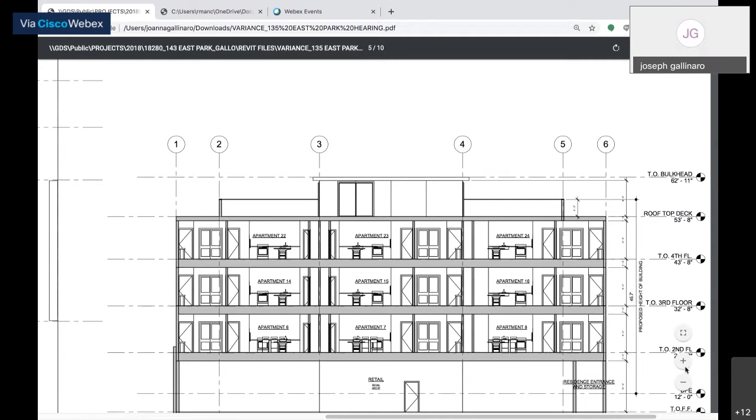Good evening. Joseph Gallinaro, 185 Lagoon Drive East, Lido Beach, New York, 11561. Hopefully, can everyone see my screen at this point? Yep. Yes. Okay, great.

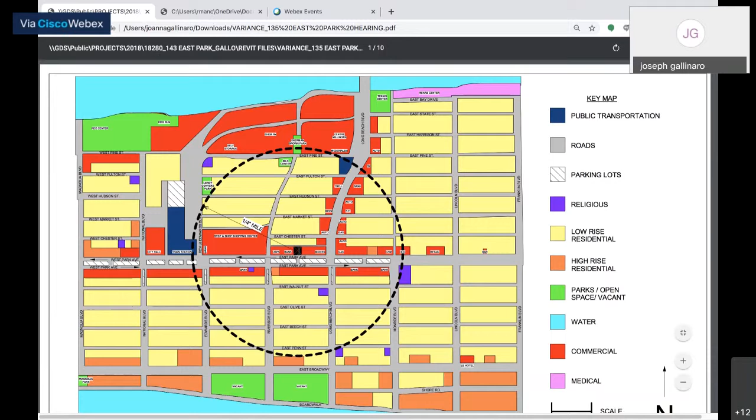This dashed line here, this circle, represents a quarter-mile radius circle around the center of the building, and when doing planning and city planning, it's sort of a rule of thumb where a quarter mile is the comfortable walking distance that one could expect when designing for a person to travel to or from. So within this circle, you see all of these amenities that the city has to offer for the building. Just outside of that, you have the boardwalk and City Hall. There's the library right here. You mentioned the rec center and so on. So it's a very appealing design if we are going after a New York City or a Brooklyn Heights model.

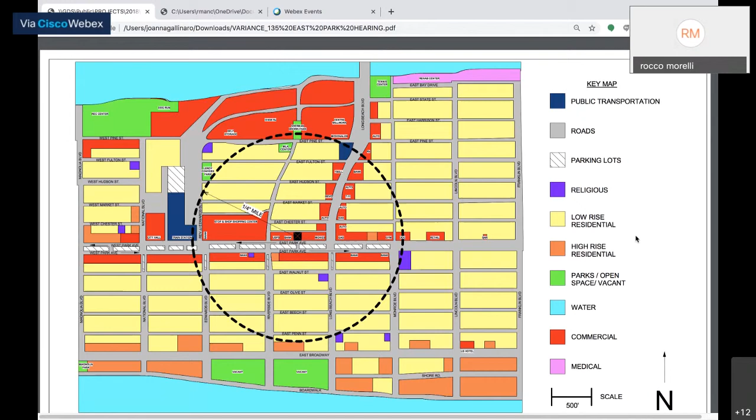But the fact is that it's still a suburban town. I don't know, I mean personally, I think that even though millennials will ride their bikes and get around, they still have cars. My concern is where are they going to park? At least half to two-thirds of the residents would own a car, so we've got to deal with that. And again, a 1-bedroom apartment is great, but their friends are going to come over with a car.

So I just want to more specifically hone in on that because I understand, it's a very appealing scenario to have this if this was downtown Brooklyn. But since it is a suburban town, I do worry about the parking and the congestion because I don't want to see this turn into Brooklyn or the areas in Queens like Long Island City that are very close to the city. They're very desirable areas, they've gotten really expensive, and I hear what Mr. Kelly was saying about how millennials want to move out of the city, work from home, work remotely, like we're doing right now. We know that's going to be the model for a lot of future businesses. But we still need to specifically talk about the number of units and what the parking is going to be provided for it, because I'm sure the commissioners are concerned about that.

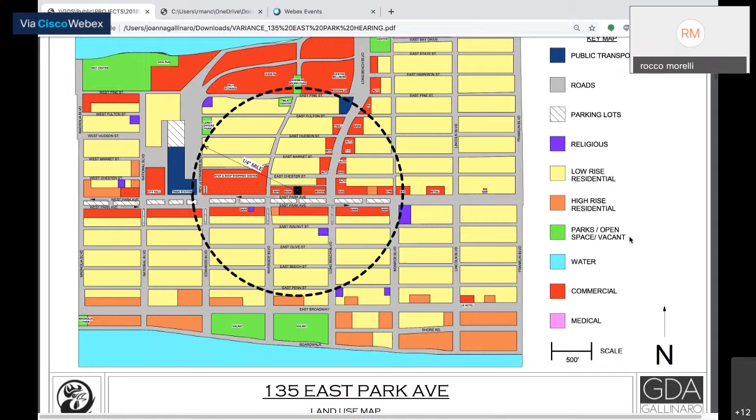So to that end, what we have here is the zoning and the parking spaces required that we're showing.

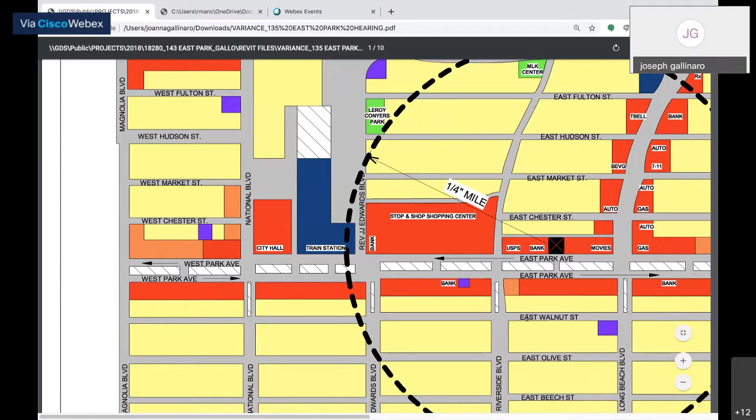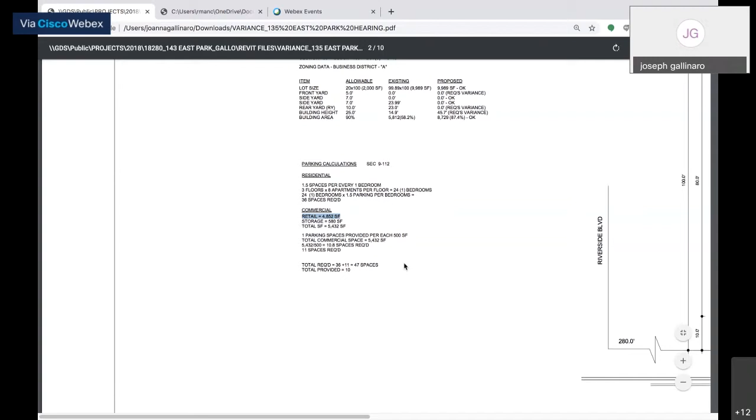Here we have our calculations for the parking per section 9-112, where there would be 3 floors of 8 units, 24 one-bedrooms, requiring 36 parking spaces. We have the commercial storage, and the total retail square footage is 4,852 square feet. The rest of the ground floor, which I'll show in a larger plan in a second, is for storage, entry, exit, lobby spaces, staircases, elevators, and so on. At the bottom, the total required space would be 47 spaces, broken out as 36 for residential and 11 for commercial. We are able to provide 10 spaces at the rear of the building, so we're roughly slightly more than 20%.

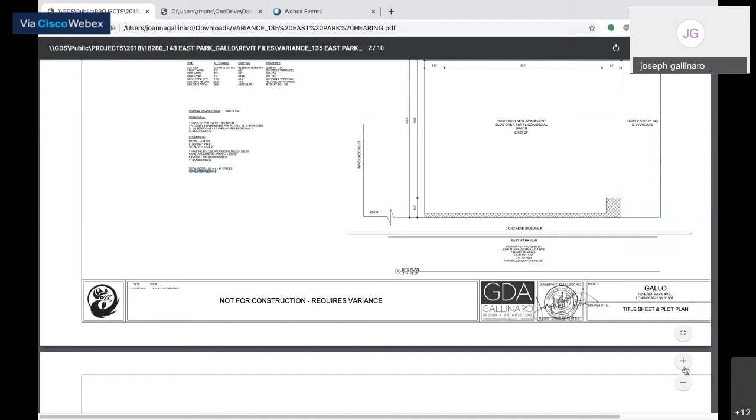Sorry, go ahead, talk about that. Let's talk about that for a minute. Let's be optimistic, Mr. Gallinaro, and say that the 11 spaces you're looking for the retail portion of the building are something we can't do anything about, so I'm not even going to count those in my own calculations. Let's say any storefront that's there is there, unless the type of business would be dramatically different than what existed. Let's suffice it to say I'll shut my mouth about that, and that the 11 spots are a given we're not really going to count.

So let's zoom in on the residential, which is something new that we don't have yet. We're talking about 36 required, and you're proposing 10 spots, correct? That's correct. So basically, that's 1 spot per 3, or actually 3.6 apartments, is what you're proposing.

Now do any members of the board want to talk about this? Because I'm sure this is where people's concern is going to lie. It's a beautiful looking building, the concept Mr. Kelly presented works nicely, but I think the meat of the matter right now is going to be the parking. It's on a congested block. This isn't the block between Magnolia and Laurelton where 235 sits, which is a big building with parking, and certainly a building like Granada that doesn't have any parking has been there for 75, 80 years.

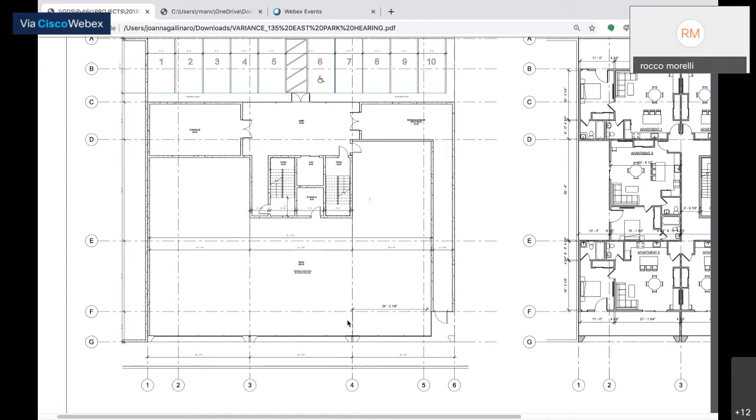So let's talk about this unique situation as I see it, because this is new construction. As you know, there's a lot more latitude with new constructions in terms of complying closer to the code than there is with stuff that's either being renovated, like 249 East Park, or renovated from an old school, like 185 West Park. So let's talk about the number of units relative to the parking, okay?

Sure. So the first thing is, unless I misheard you, there are 24 units with 10 spots, so we're at one spot per 2.4 units. Right, okay, yeah, so we're roughly 27% of what required parking would be for the units.

There's a difficulty in providing parking for any building that's tight like this. I have right now the ground floor plan open.

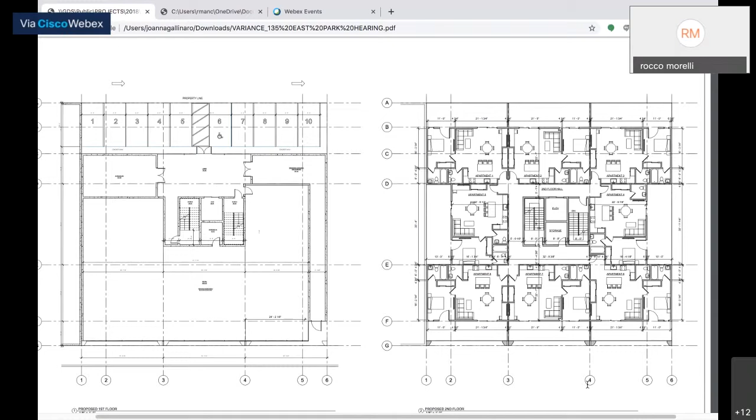We also have Darren and William Gallo on. Should I leave them muted, or should I unmute them? I'm bouncing back and forth between screens, between presenters. Let's at least question Gallinaro a little bit more about it, because I'm sure some of the other commissioners have questions. I don't think I answered everybody's questions by my line of questioning. I'll leave them muted, let me know when I should unmute them.

Unmuting Mr. Gallo and Mr. Gallo, you're both unmuted right now. Can you guys hear me? Yes, yeah, go ahead. I don't have a question necessarily.

I just wanted to make a comment regarding the parking discussion and the commercial space downstairs. I just want to make sure, and I hope everybody else is on board, thinking aesthetically, I don't think it would be pleasing to have parking underneath the building in general, because it's like a walking section of the island, and I think the least aesthetically pleasing thing would be parking under the building. If you look at other communities throughout Nassau County, a lot of their commercial buildings have parking underneath, and it becomes very unattractive to the town. So I don't think putting parking underneath is a solution.

I agree with you aesthetically, Erica. However, I will say that if the challenge is that retail is suffering, and it may suffer more with time based on the Amazons and everything else going on, I think it would actually change the balance. They'd have to do something aesthetically pleasing to make it work, but it would take out a little retail and add some residential.

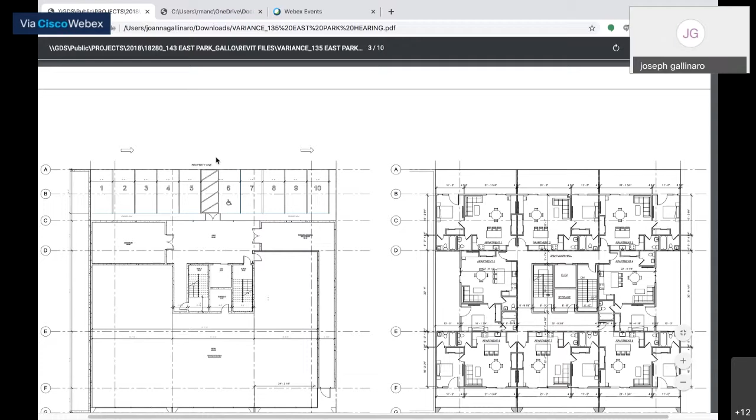And you couldn't access parking from that, like for the residential units at least? Well, that's how we are. This is the rear of the building back here. Here's parking in the front, where the retail entrance comes in off the sidewalk. There's a private entrance for the residential off the Park Avenue side, or the southern side of the building, where you walk through back into a lobby with the elevator. The driveway, the small road that's back there, the existing road being utilized today, remains. Our building is set roughly 23 feet in from that, so you can come off that existing road and park in here and then walk into the lobby that way.

Can I be heard right now, Joe? I can hear you, Darren. Okay, so existing behind the building now, I just wanted to mention, is about 8 spots. We're actually adding spots because we're closing out the alleyway that people have been driving through, which is part of our property, the alleyway on the west side that he's pointing to right now. By closing that alleyway off, we add 3 spots.

It's actually a very dangerous alleyway. I've driven down it and seen people almost get hit a couple of times on that sidewalk because they don't pay as much attention there since it's a vacant building. It's very tight, yeah, it's an alley. So we're adding 3 more spots by closing that in than what's there today, behind there, and adding a handicap spot.

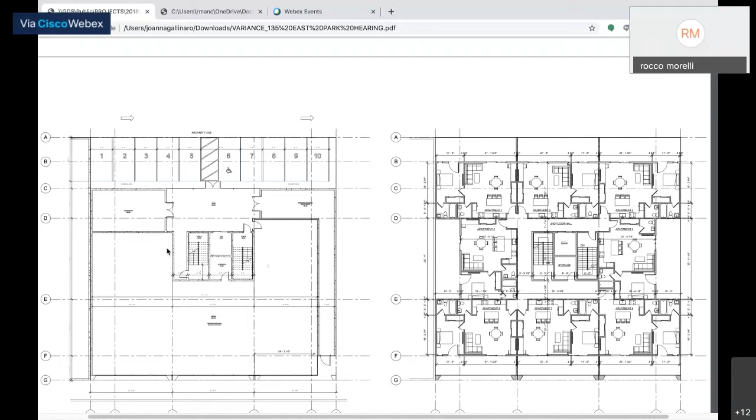I'm not really sure who utilized it then, but I can tell you now, since we've owned it, and I'm friendly with Gentle Brew and Yummy Yummy, basically I park back there, Gentle Brew parks back there, and Yummy Yummy will put one car back there today. So it is being used today just for being a friendly neighbor, since they usually park in front or across the street, and I allowed it. I said, why don't you just park back here, we have room. When the bank was there, you parked back there to go into the bank.

That's right, going to the bank, that's right. That's what it was, and it was part of a drive-through thing too. We used it to go to the movies back in the day. Right, yeah.

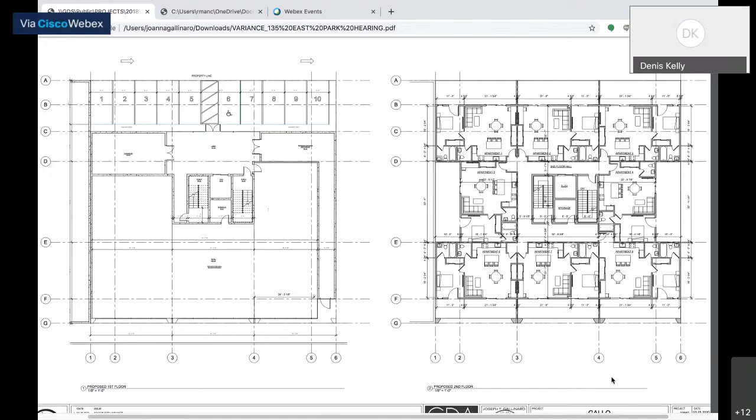Well, I'd certainly like to see some financial justification. I think this would be a very important part of a presentation here. So it's Denis Kelly speaking again. What we can do is put that together for you, Mr. Leonetti, Commissioner, and also try to see how we can even make the parking better if possible. Maybe I'll get in touch with Mr. Berrios and talk to him about what headway we've made, as well as getting you that financial analysis you're looking for.

How long has the building been owned by the applicant? Since December.

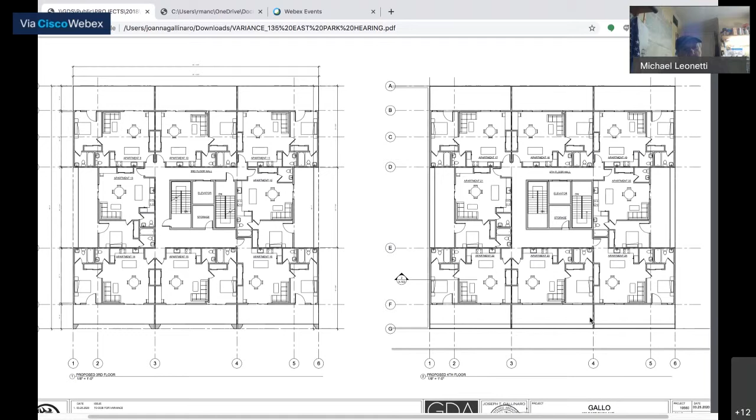I can speak to that, if I may. Dennis, can I just speak? Sure, okay. I just wanted to give everybody a little history of who I am and why this is.

Darren Gallo, owner. I'm a local resident. My name is Darren Gallo. I live at 651 West Penn Street. We also, as you can see on the application, own 143 East Park, which is adjoined to this building.

We spent a lot of time designing and greatly improving 143 East Park. We set up our office, real estate management, investment, and construction company on the second floor in the back half of the building. I spent a few years going in and out and looking at this building, watching it be vacant and dilapidated. When we found out there was an auction on the building, they were basically giving up on it because they weren't getting their rent from the Citibank anymore, and there was nothing they could do with it. It's got a vault in there, and you'd have to knock it down—it can't be repurposed.

We decided it was a good opportunity for us to purchase the property right next door and bring the opportunity to bring the downtown Long Beach area up to par with other downtown areas in Nassau County by introducing the mixed use building that you see today, similar to what the comprehensive plan asked for.

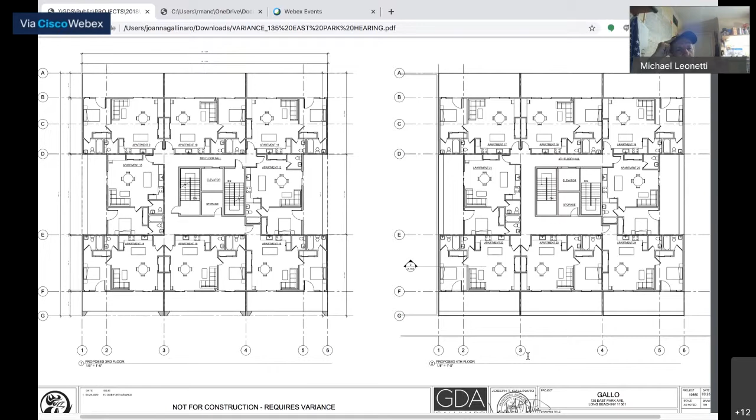What would projected rents be again? Somewhere between $2,000 to $2,200 we felt was the market for this. Because of its high end, it might be higher, it might be lower. I don't think it'll be lower. As you can see from the rendering, this is going to be a building that doesn't exist here yet, with a very high-end virtual doorman that's literally a person on the other end who lets in people to deliver Amazon packages, bike storage inside, not outside.

We also have ownership of the Lindell building. That's 7 one-bedrooms with the Lindell Deli, and outside parking for bikes, no real amenities there. So rents there have helped us understand what we believe the rents would be here. We're not just throwing a dart against the board here.

To go further into my analysis, when we looked at the 4 stories, the building you're looking at today, that was a decent return. I'll give you a number. A 4-story with no retail, our return on investment would be about 5%, 5.5%, because when you eliminate retail you eliminate sharing in the taxes, since retail takes over some of your tax base. It also lessens the amount of taxes the town would get.

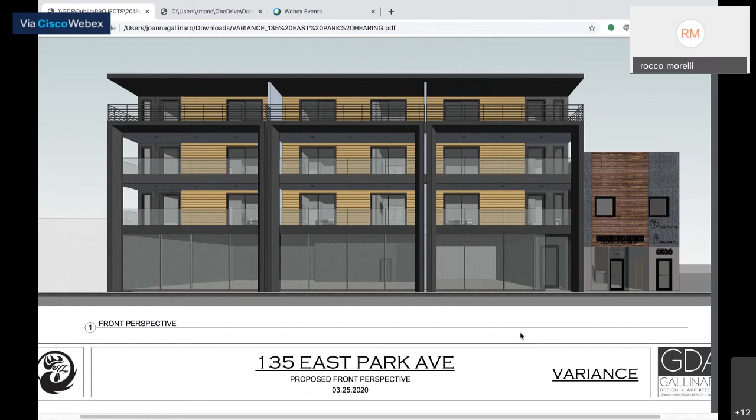So we evaluated something with 3 stories and less retail to accommodate more parking, and it drops our return, actually the worst return, which is about 5%, which is really hard to fathom spending that kind of money for that kind of return.

There's another scenario we looked at, close enough that I would consider it if we really crunch it, which is the 3 stories. You eliminate 8 units, leave the 10 spots, now you have a much better parking scenario. And the construction costs - what happens when you add a story, the costs aren't as high per square foot. As you build higher, it costs less per square foot, which helps your return.

But with 3 stories, I believe my father and I, who are the sole builders and investors in this, it's something we could potentially do, basing it on hoping the rents are higher than what we're projecting, and they will be maybe someday. So that's something to consider if that helps in the parking scenario.

That one was closer to 7. And the one we're proposing to you now is closer to 8.

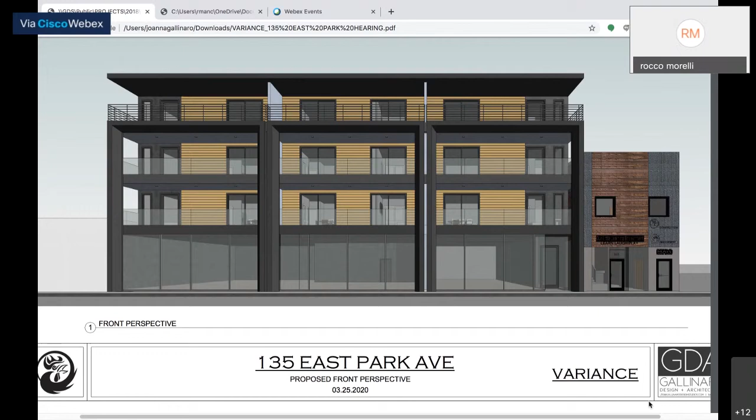I think the commissioners have covered a lot of questions right now. Did you want to wrap up the presentation with anything? I think I would call that a wrap, Mr. Chairman. I think the commissioners and my client and the architect did a great job.

Frazier, do you have anybody on the line that wants to speak for or against? We haven't received anything on this.

Thank you, Robin. All right, so then I would say that the case will remain open until voting. If Mr. Kelly, your client, wants to submit any other documentation, that time was available. Right now the case will remain open until voting, and we'll move on to the next case. Great, thank you for your time. You're welcome, thank you guys.

All right, this is the last case, number 3157. There's also 2 extensions, but case number 3157, application of Teresa Senatore of 38 Pennsylvania Avenue, Long Beach, New York, for a variance in the following sections of the zoning code of ordinances of the city of Long Beach, New York: 9-105.5C yard, 9-105.5B side yard, for a new front yard deck with steps at 38 Pennsylvania Avenue, Long Beach, New York, also known as section 50, block 264, lot 9, on the Nassau County Land and Tax Map.